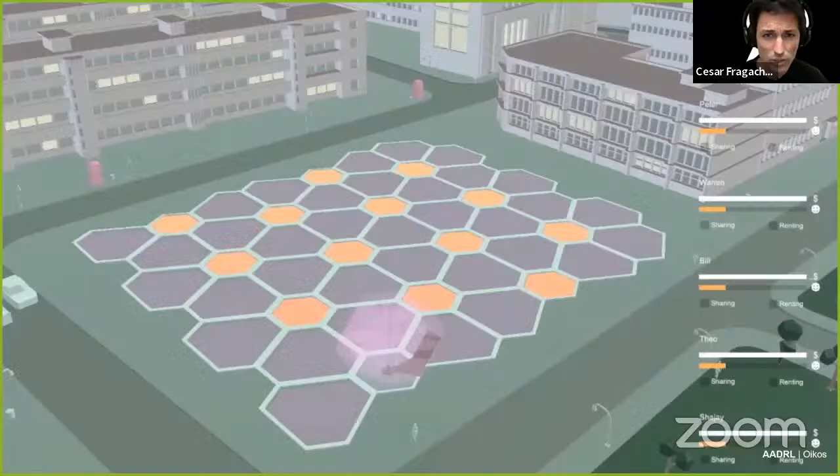I'll take you a little bit through the journey from architect to computational designer, and now as founder of the company, as you mentioned. After leaving Venezuela about 5 years ago, I started at the DRL.

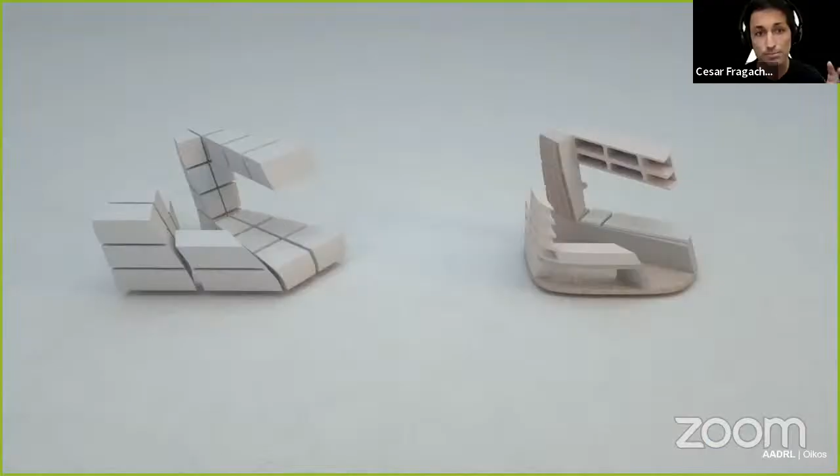I was always quite interested and fascinated by gamification in architecture, and the idea of empowering people to customize their homes. As designers, we want to potentially try to get everyone's intention or everyone's design in, but when working on big projects, it's very hard to satisfy everyone. So nowadays the model is almost about a one-fits-all solution—we've kind of embraced standardization.

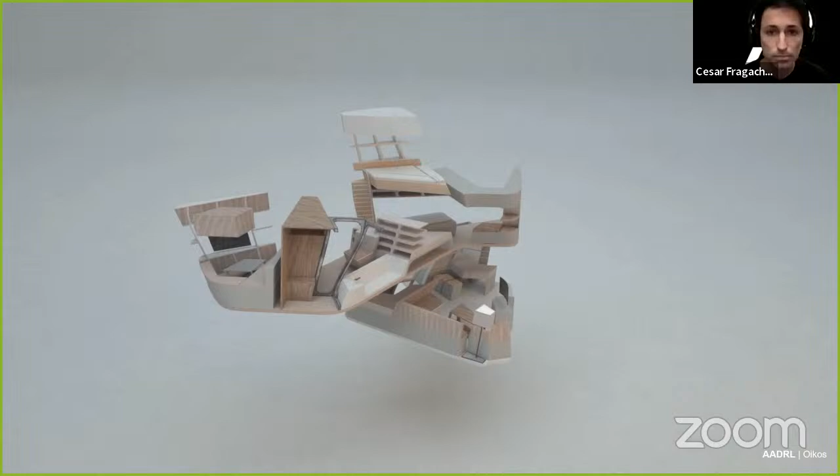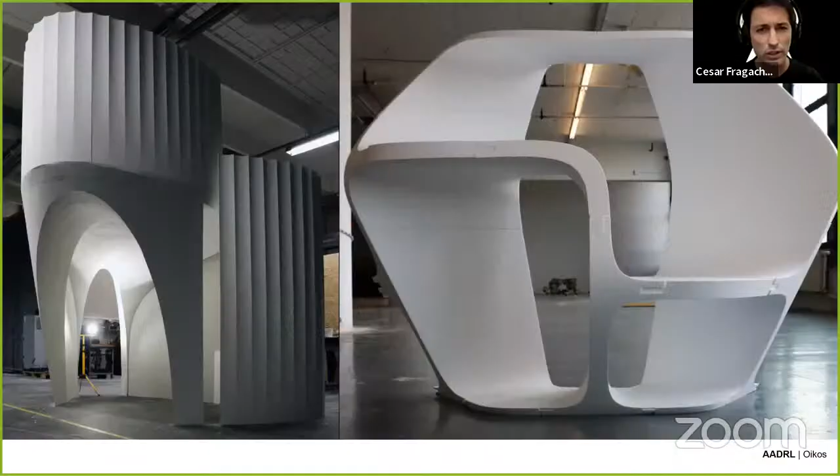The idea of this highly academic project at the time of the master's was to empower people to customize their own homes, their own units, even some of the community spaces. It was a gamified platform where different users jumped in and negotiated a lot of those spaces, collecting data in the process and also leveraging digital fabrication to build some of these spaces. Matching the digital and physical world has been an important part of my career, and something we're also pushing at school.

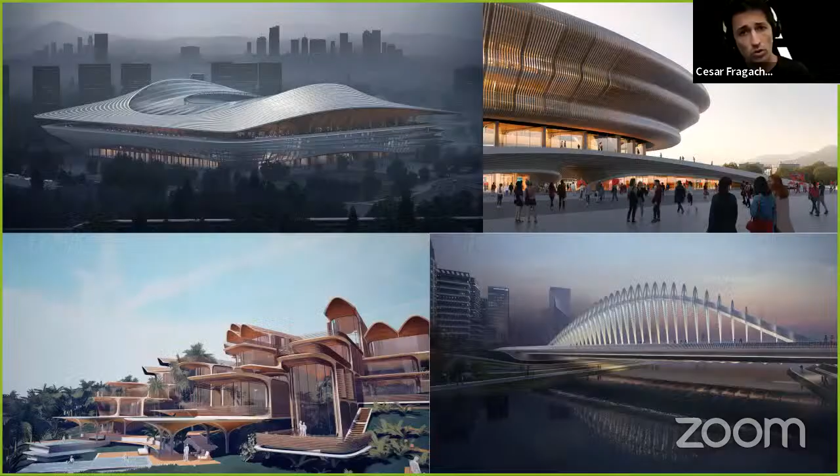These two models you see: one was a one-to-one prototype we did at the DRL with a company called Odico in Denmark. The one on the right was at Autodesk Boston's build space, also leveraging hot wire cutting with robotic fabrication. That led to the journey at the Computational Design Group at Zaha Hadid.

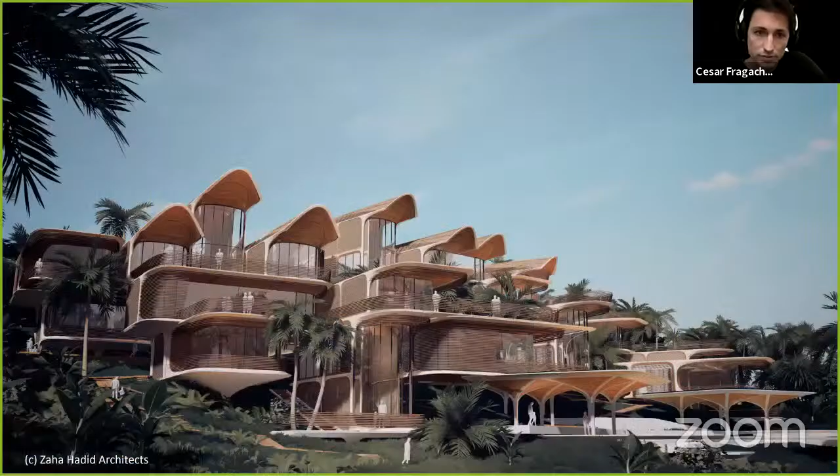We worked on big projects, from competitions to delivery stages, and a lot of these projects involved a lot of computation and rationalization of complex geometry. The one in the bottom left is the Beyabu villas in the Roatan Islands in Honduras.

Everything you see here is modular construction, standardized into a kit of parts, crafted to leverage empowering that kind of design.

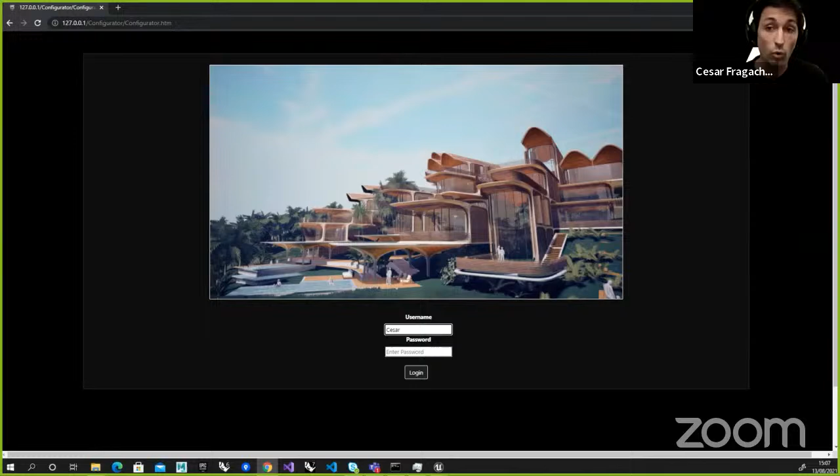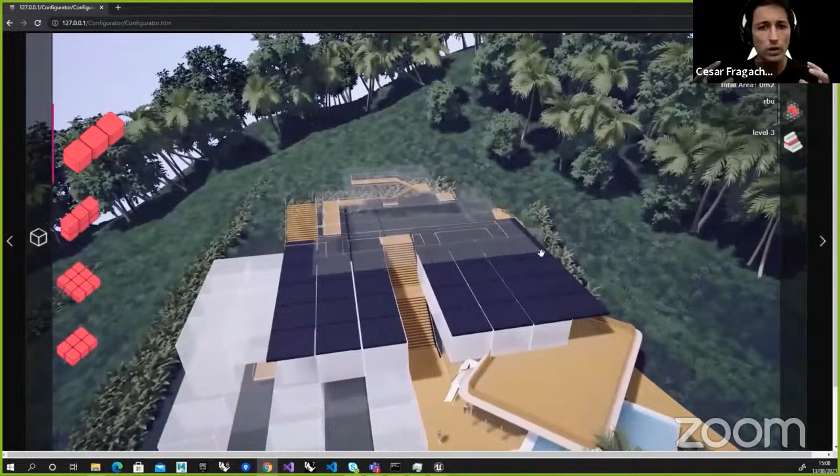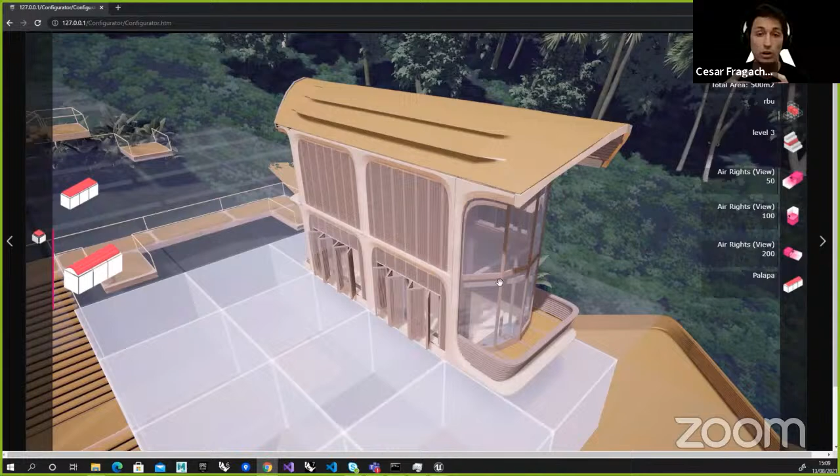For these projects, we built a configurator. Users would come into the platform—we were driving sales of some of these units, gathering data on how people would like to position their spaces, what spatial requirements they'd have, and also adding extra features like buying air rights. So you could say, 'I want to lock the side of my unit because later I want to expand that space,' or 'I don't want anyone on top because I want to add a palapa or a double-height space, so I don't want anyone else above me.' You start buying the air rights as well, not just the unit.

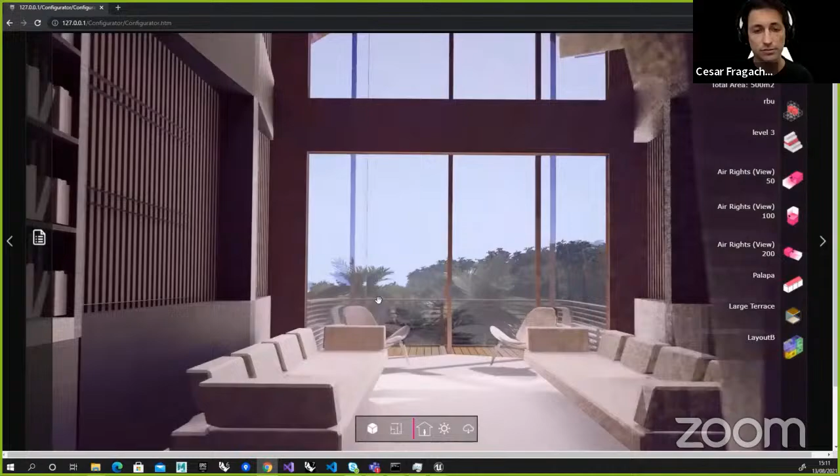You can also start customizing the internal layout for any given modular site. This one is assembled based on three voxels of 5 by 5. Users could get in and look at the view of the property, how neighbors might block the view, and even negotiate some of these spaces.

That turned out to be an interesting exercise, and was actually the pinpoint moment that led me to go out on my own and start Alter. This was the first demo that we built at the company.

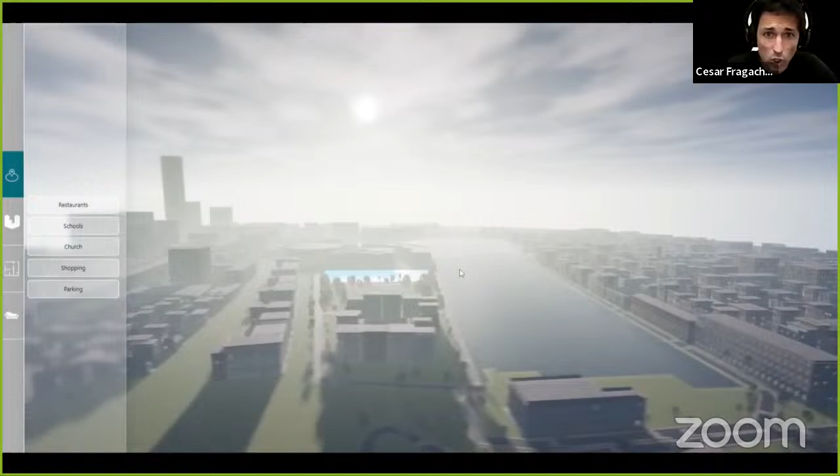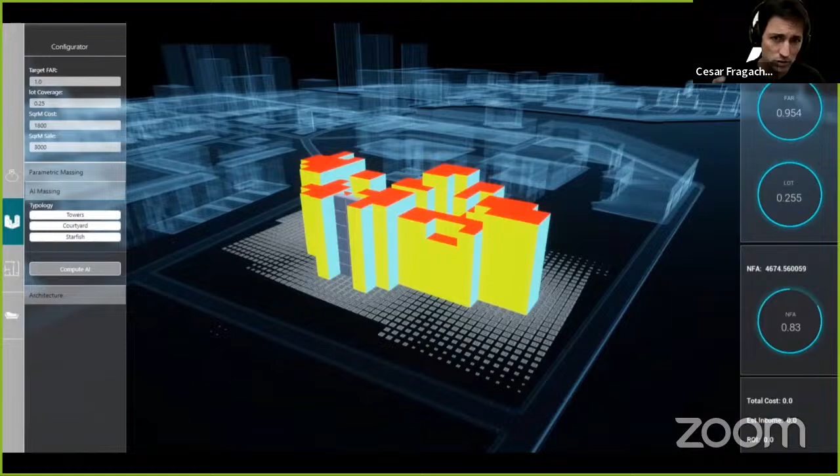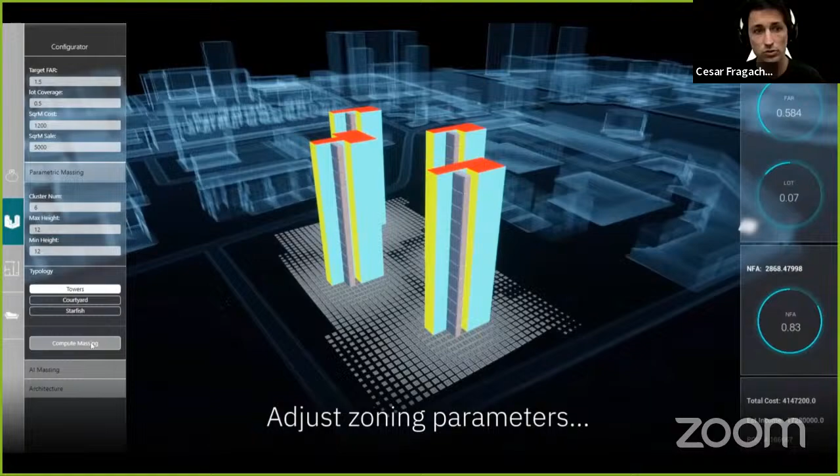So it's connected to OpenStreetMap data, procedurally regenerating a section of the city based on actual information. Then there's an evolutionary algorithm that runs through the site specified by the developer. What you see in colors and optimizing on the right are the financial metrics, and in colors there's the solar radiation. So the algorithm is trying to maximize or minimize some of these quantitative data.

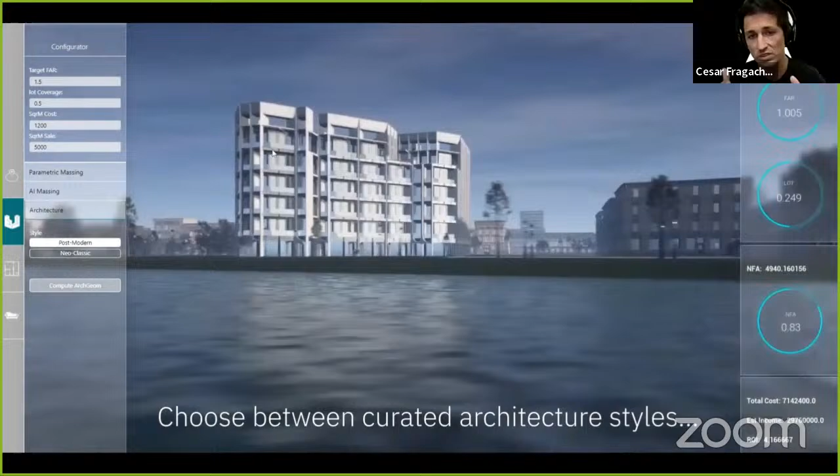Users could also parametrically override some of the findings or outputs from the algorithm, so they could customize how many towers, what's the typology of the building they'd like to see, and they can also style the facade. Everything is deployed within a kit of parts.

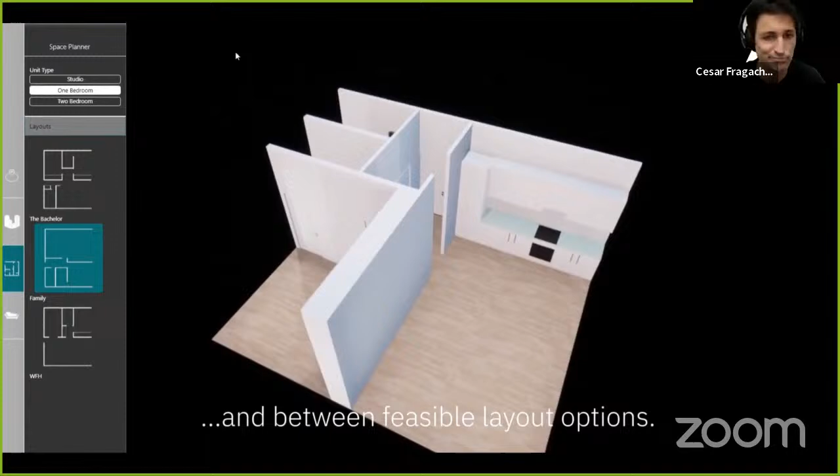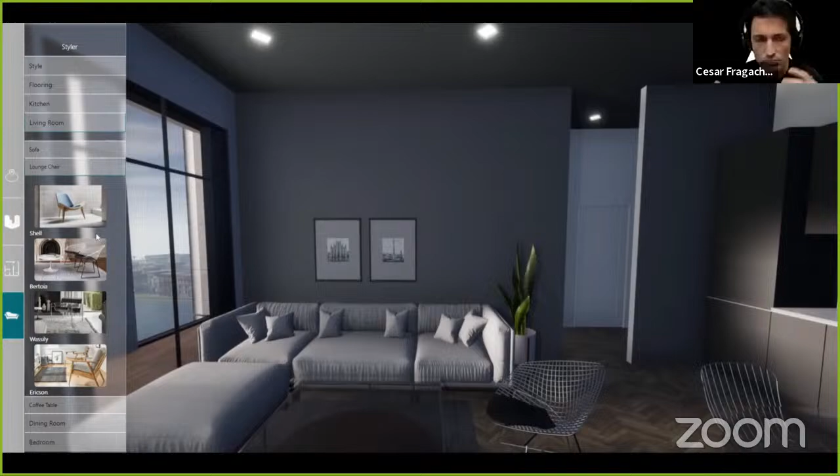And this is not an animation—this is actually how the software is working at the current speed, maybe sped up by half just for the sake of this video, but it's quite fast. Users could actually engage in pre-sales of the construction and start seeing how that unit, which might be generic in structure for all the bottom units, can then be customized in the interiors, giving a bit of gameplay agency to the people buying these houses.

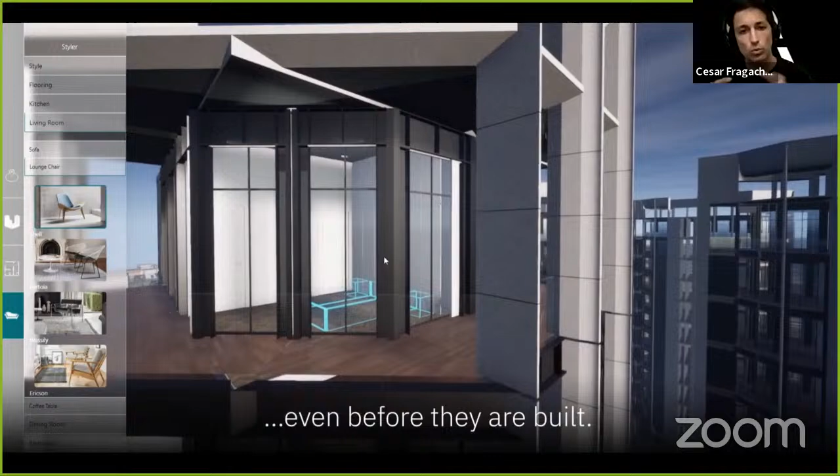They could go through almost like an FPS, a first person shooter game, where they could actually feel the space, the view, the relationship between spaces. Eventually, we're also interested in exploring the virtual community, where you could see what your neighbors are doing on other properties, potentially copy some of them, or even meet them online beforehand.

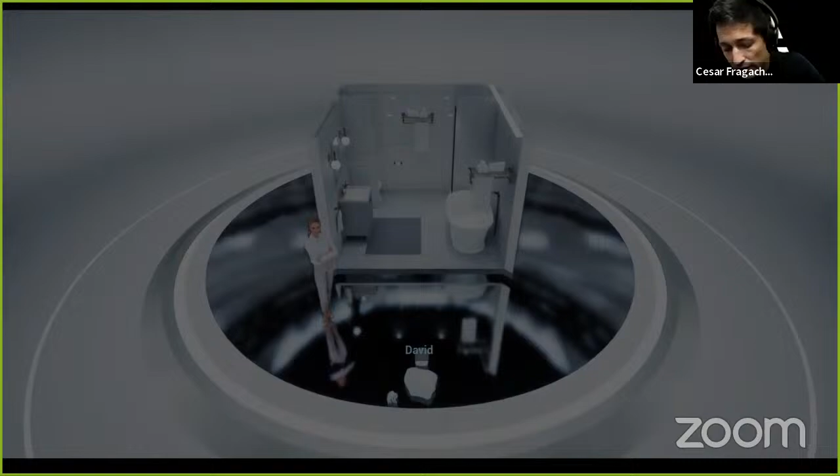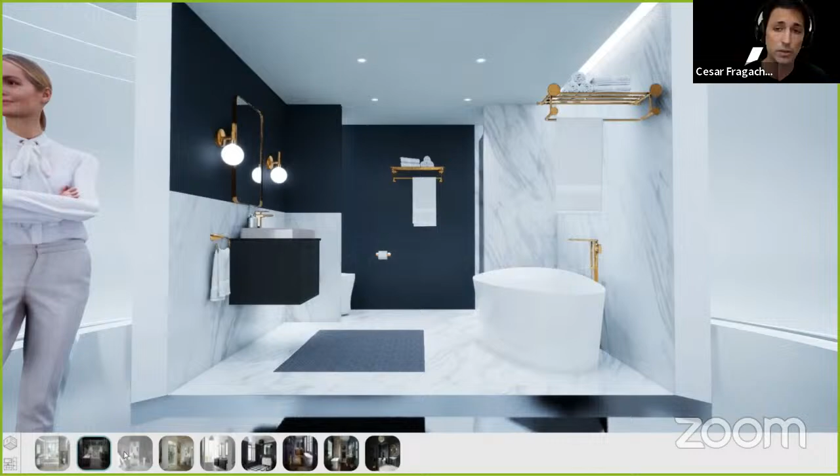So this is another demo, for a home supply store that commercializes high luxury bathroom items. It's building a virtual showroom configurator to start on their stores, then pass to the website. Users could choose the measurement of their bathroom or a specific layout within those measurements, and the system would procedurally generate all the items with embedded styles, letting users choose between styles and go through each item connected to the database of assets to see the price and finishes.

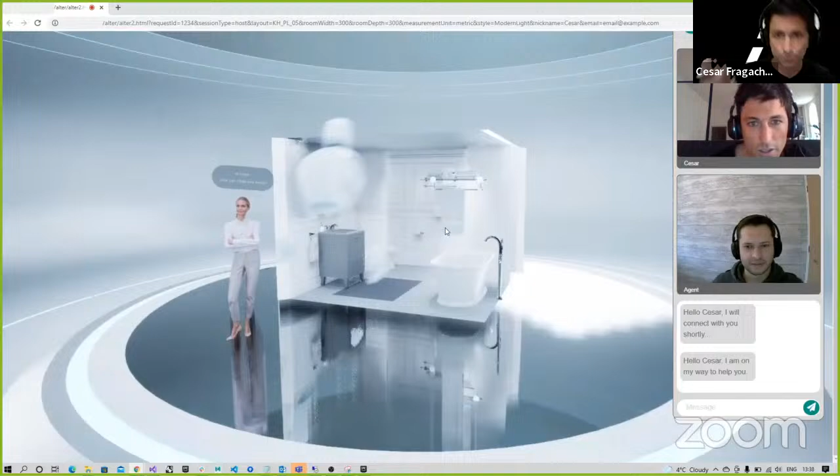So instead of seeing a static view on the website, you would see that specific piece in your bathroom. It's also connected with a multiplayer platform, so you could have a conversation with a virtual agent helping you configure your bathroom, and then produce a full brochure of all the items you're interested in buying.

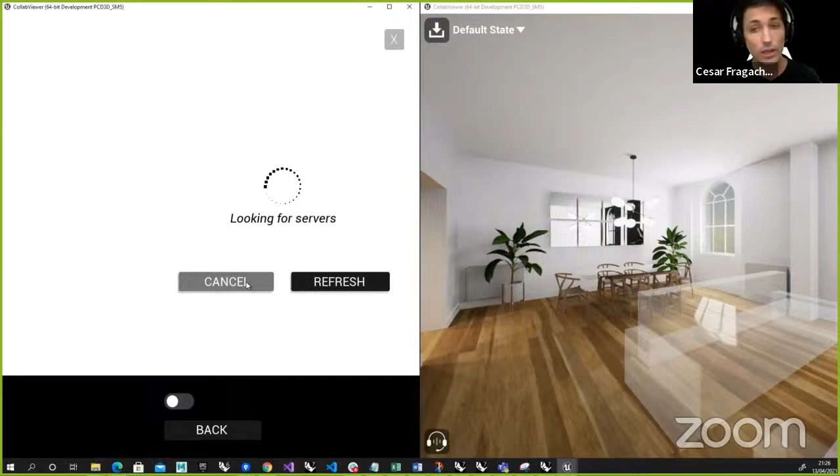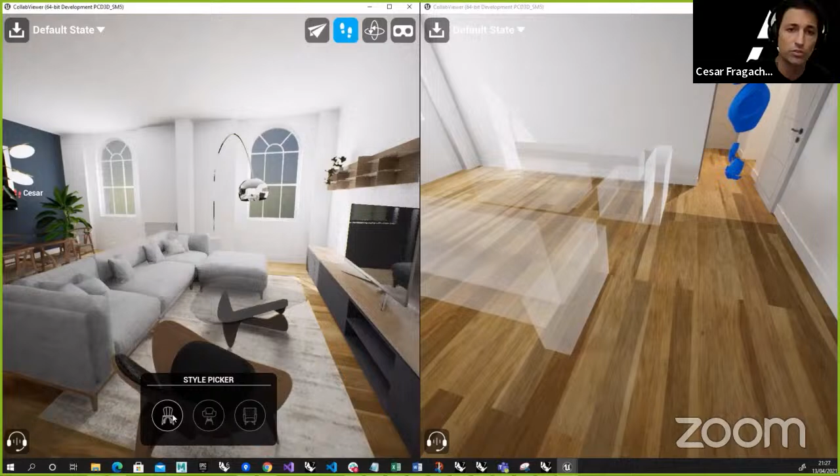So again, a similar experience, more for the real estate world, where two users can be in the same session. This could also be tailored to designers, so they can drive their clients, or agents driving their clients, to show them properties and showcase different potential configurations of that space.

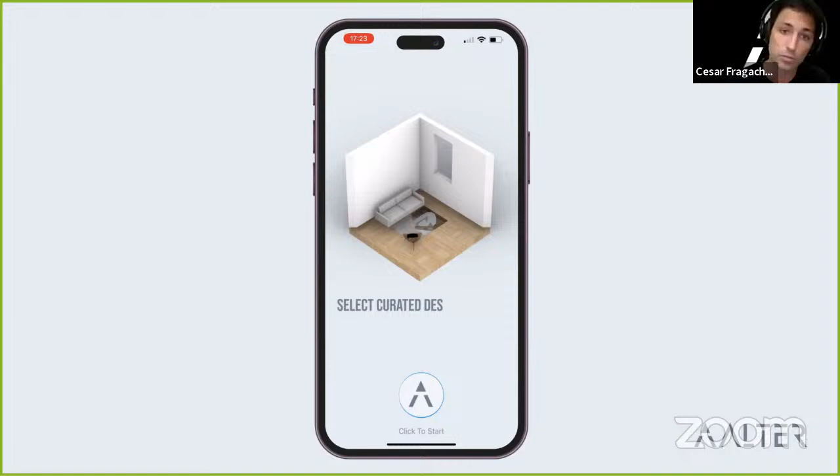One of the things we're currently developing is going to be an app for virtual staging at the beginning, and eventually, if it proves successful, take it to market so people can configure through their phone.

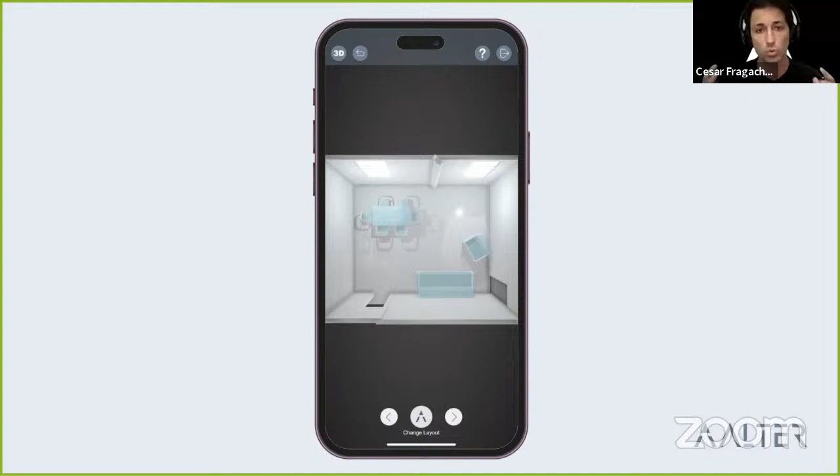It's using RoomPlan technology released by Apple almost a couple of years ago. This technology indexes all the elements within a given space—windows, walls—and then there's an algorithm that starts optimizing based on the space that you want.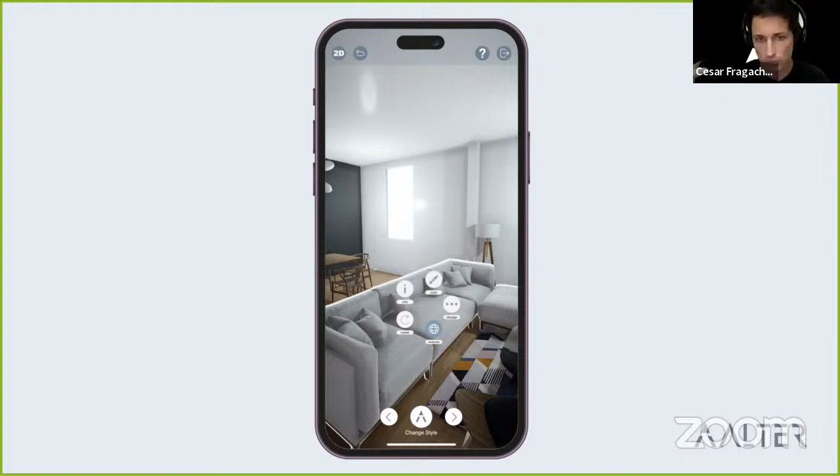Then our technology would procedurally generate all these items, add the given lighting, and it's also connected to the database of the stores. You can then start seeing how all of these furnitures or items look in the space.

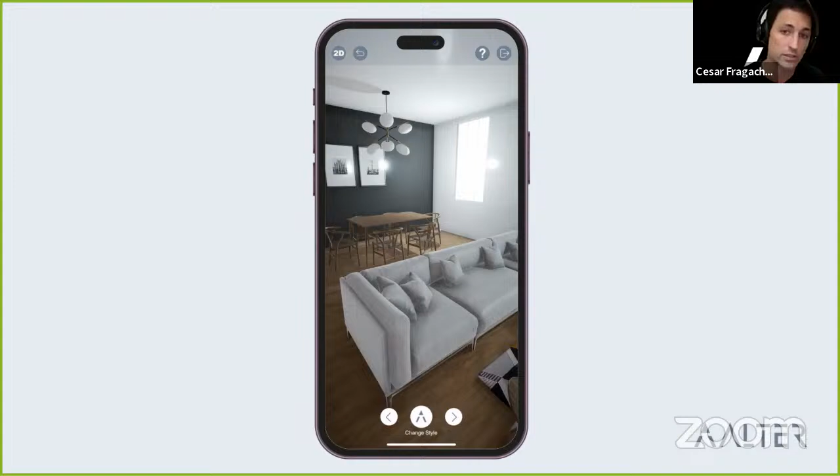You could also have pre-selected styles, and then you can start adjusting them one by one.

This one—so one of our clients is a modular construction company here in the UK.

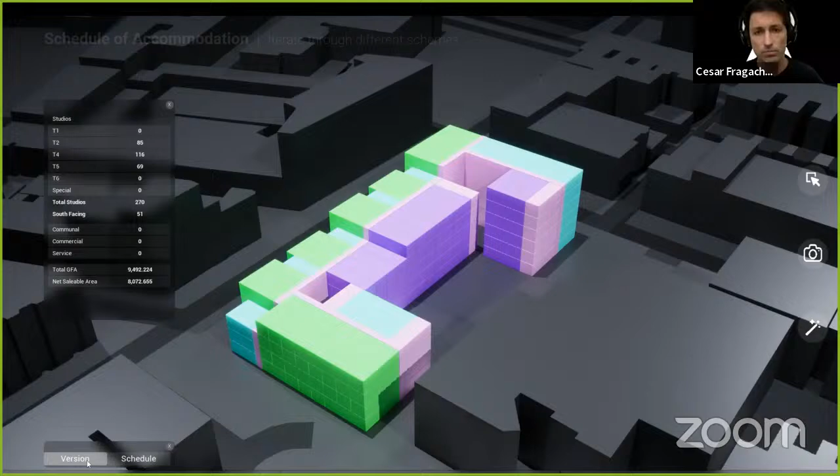They work mainly for student accommodation, and we're developing this tool that they can very quickly iterate through different design concepts, study all the financial metrics, schedules of accommodation, bill of materials.

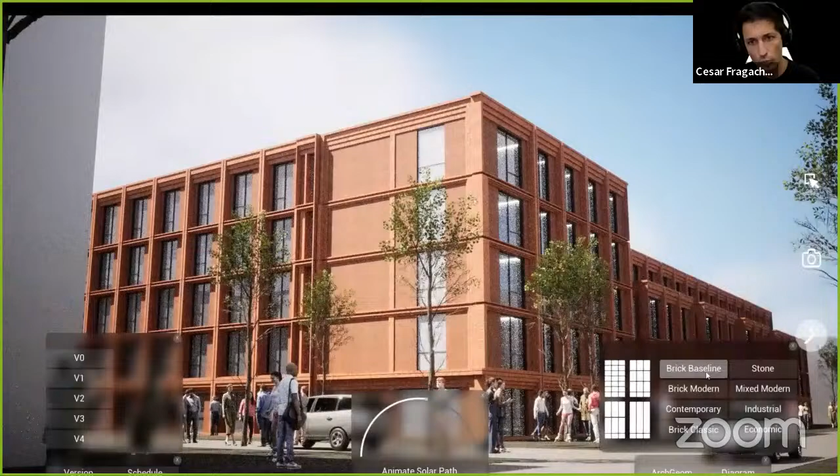So it's a plugin in Rhino and Revit that then communicates with the cloud platform, and then you can start very quickly iterating through different facade styles, of all of the options that are being pushed by the designers.

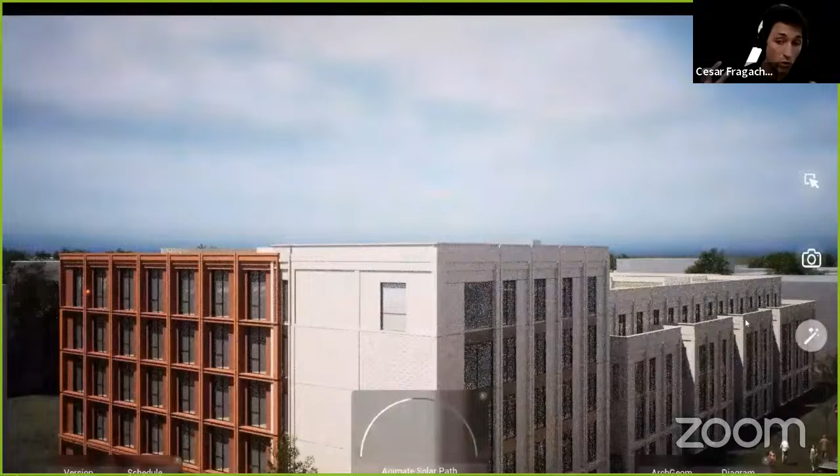So you could not only evaluate a building by financial metrics, or schedules of accommodation, bill of materials, but you can actually qualitatively evaluate a building by its looks, by its facade, and then run solar animations on how the building is exposed to the light throughout the day. It also has a path tracer functionality, since it's built within Unreal Engine, and you can extract all the entourage - people, trees, cars - reconstructed procedurally from OpenStreetMap data.

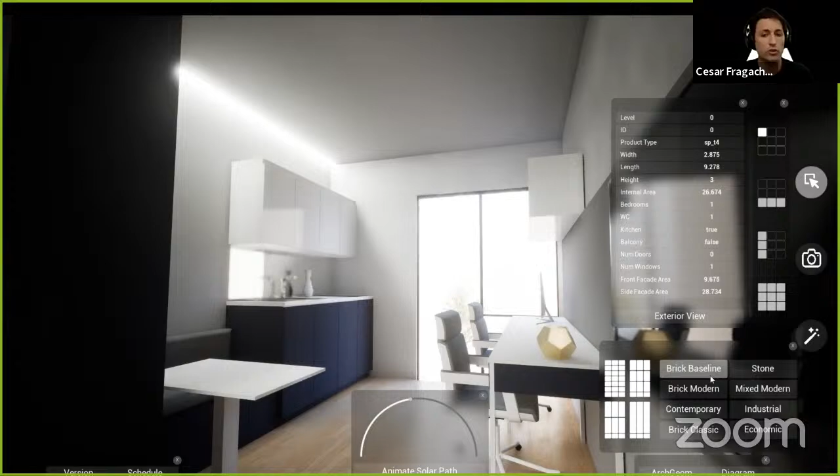So designers don't need to really care that much. There's a lot of time that is spent. This is not to take your high fidelity render that you're going to push, but it's just to take those images that could go through planning applications, or just to take high level decisions in early stages of a project.

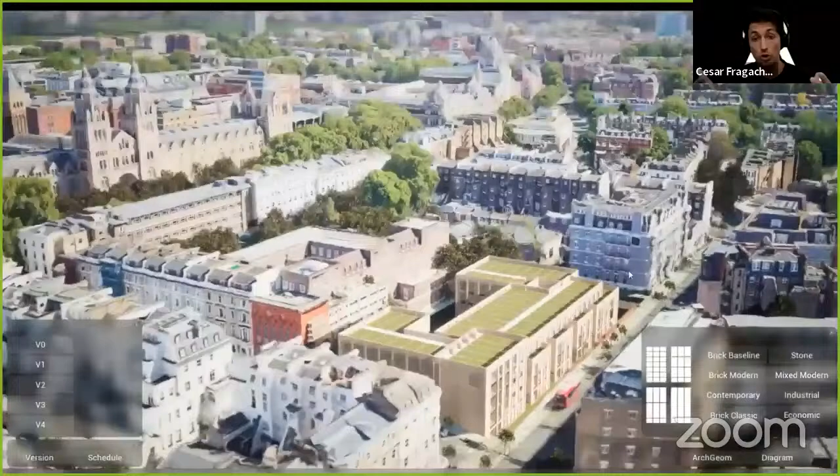Using Cesium, we're also leveraging that technology just to embed Google Tiles and photogrammetry within the building, so you could see how all of your options look within the actual city.

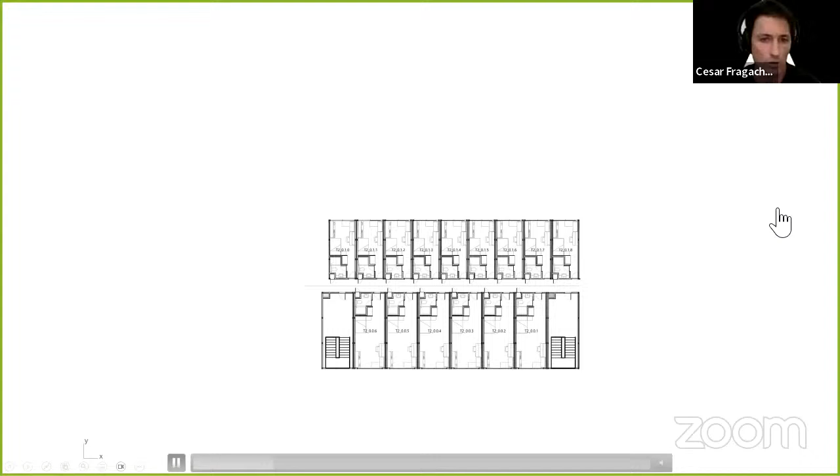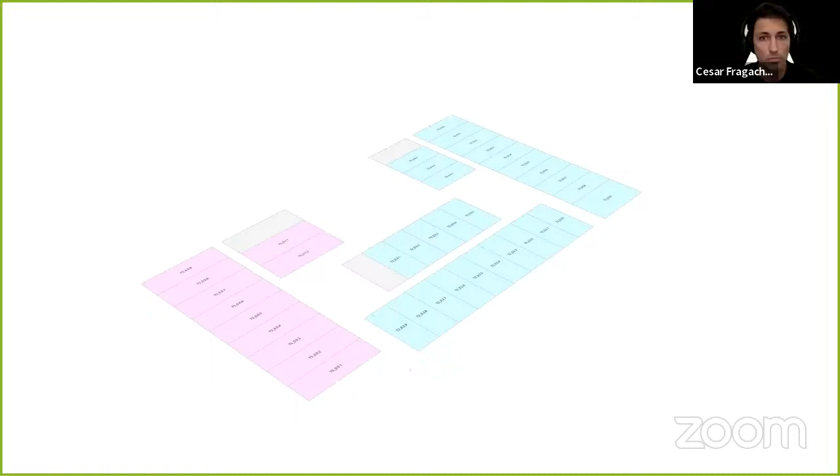And then this is from the plugin side, for Stirling Properties as well. This is the plugin they were currently developing for them, just to have a very quick parametric tool where you could adapt all of their modules based on circulation and fire exit. So it will start computing the optimum dimension of the modules, just to maximize the number of units without sacrificing comfort, and optimizing to have the maximum net sellable area.

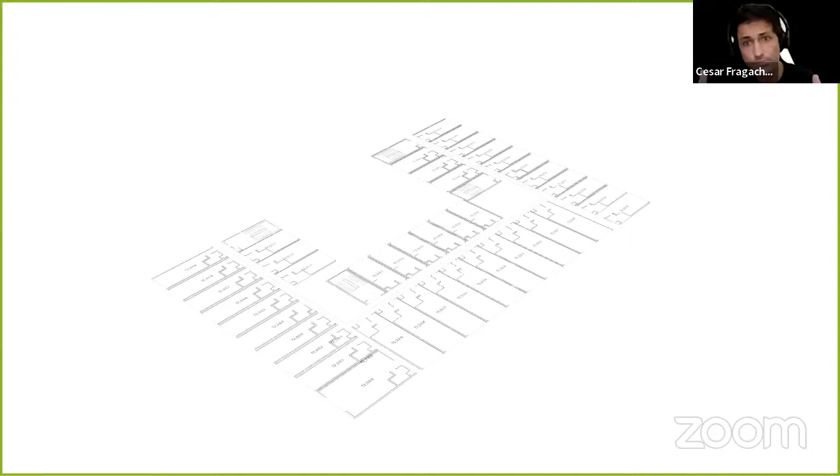And since all the software is intelligent enough that it knows what unit is in a corner, what unit is connected to a circulation, it will deploy all the architectural components, and then all those elements will get exported into a Revit format.

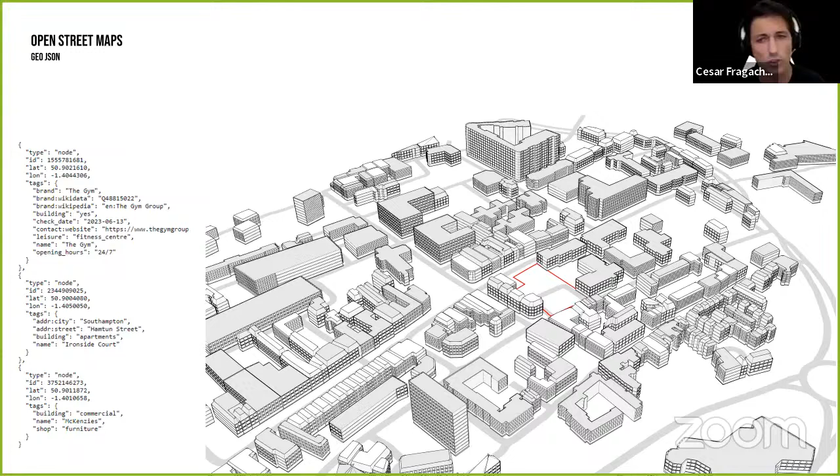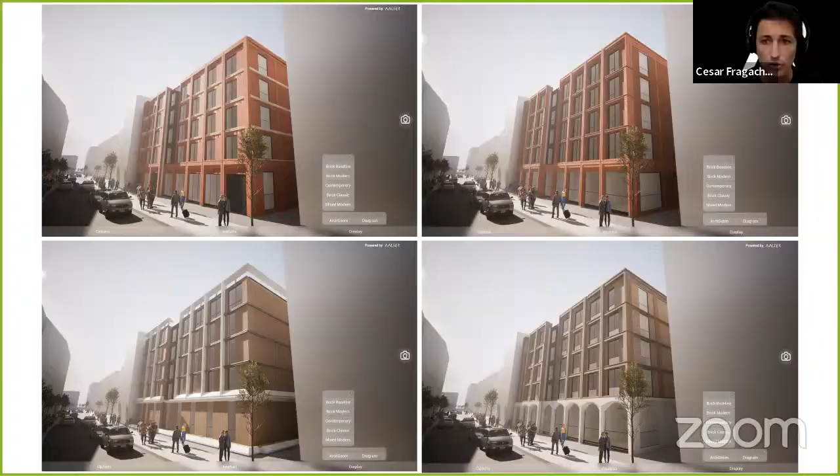So again, this is just a little bit on the technical side, how it connects to OpenStreetMap data. You could run very quickly from the plugin different context analysis straight away. It's all automated. You could see from the app different styles, and different material styles. So you can very quickly evaluate at any point any facade option, or any detail.

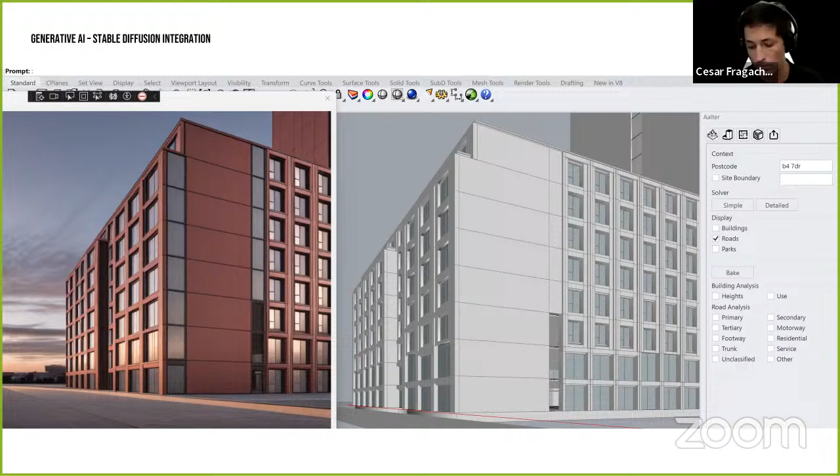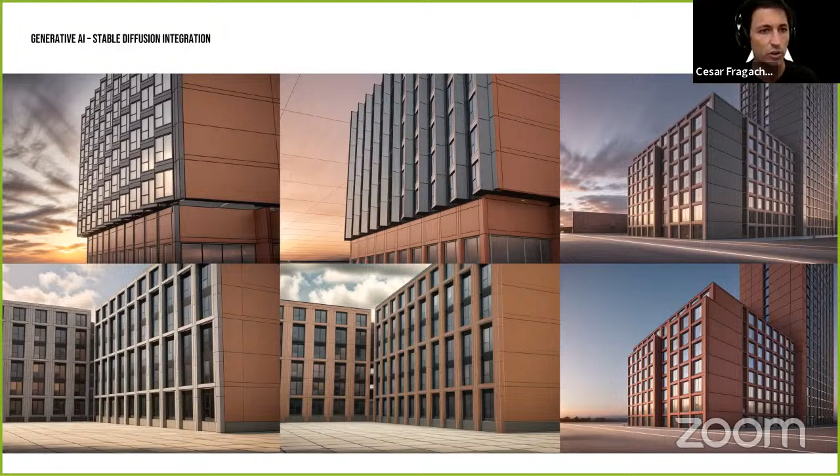So one of the things we just also integrated within the plugin is a Stable Diffusion connector. So you could basically take your screenshot from Rhino, put the prompt, and this one has a LoRA model that is also trained with the client's style. So you could get some high fidelity renders of the actual style too, just to do this very early stage concept exploration of different kits.

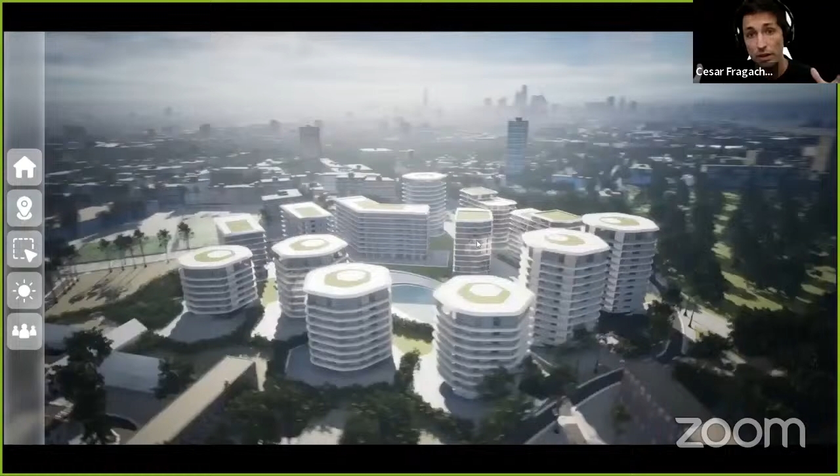And lastly, we work through the different stages. So once there's also a property that can be sold - this is for another client.

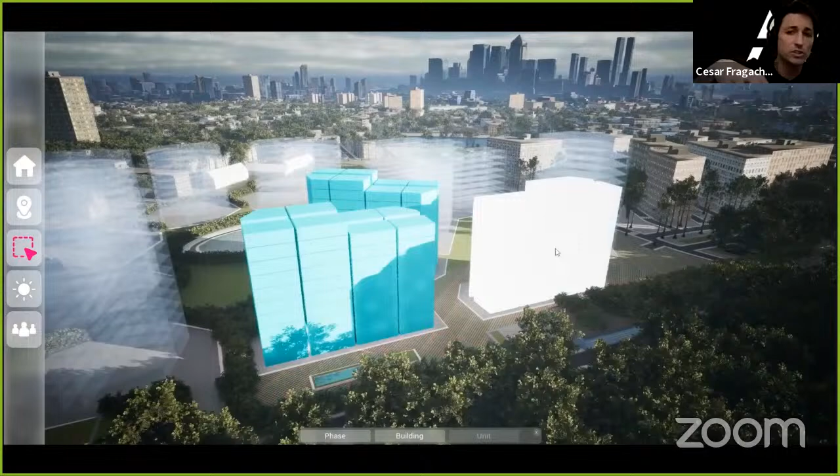So this is a demo also on a complex in London where you can start evaluating, seeing what are the main features on the city, and they have a phase development that is going to come in stages, and they're going to be sold in stages, so they can unlock different sites, and then the users or people interested in buying any of these properties can see the floor plan, get inside, and start choosing between different styles, layouts, and then start configuring each of the furniture.

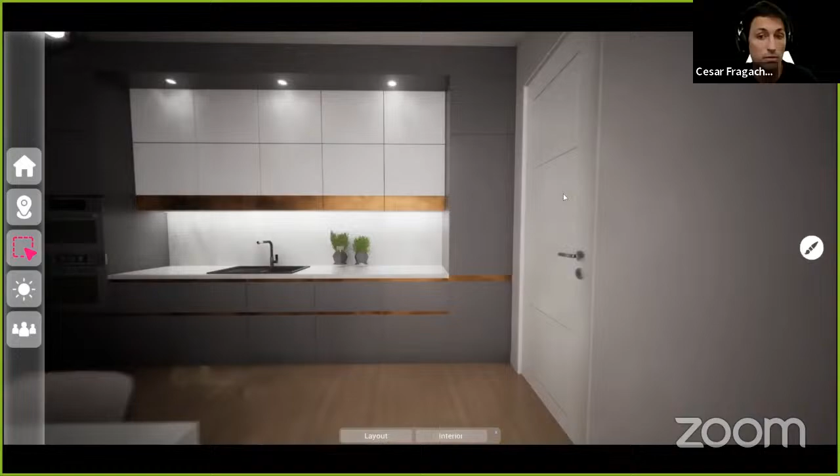So ideally, what we would like to push is potentially you could even completely buy or completely set your interior design. So by the moment you want to move to these properties, you already have all the furniture that you need in the correct location.

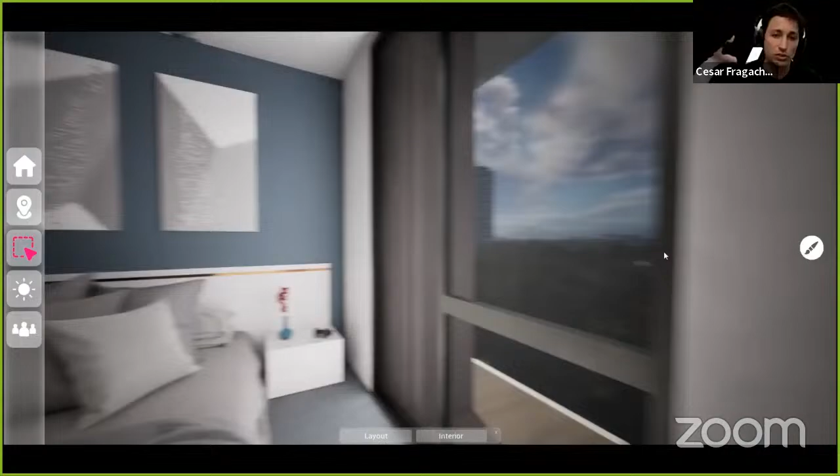So if a digital twin already exists, this digital twin model can live on in the future. So running out different conditions of solar analysis, because people that want to move into some of these properties would like to see what's the view from the property, but also what's the solar influence.

So this is all real time. It's not being animated. This is the kind of quality that you can get from a game engine, specifically on Unreal at the moment.

And then leveraging also the configurator technology that we plug in. So I think that's a little bit on our side. I'll leave it running for a couple more seconds, just to see a couple more shots. But basically, that wraps up the story. We're quite early still at the moment - it's been just a year since we started. So looking forward to what we can push in the future.

Awesome, thank you Cesar, that was very interesting. It's amazing to see your examples, how it is evolving, and the capabilities you're pursuing, and how that will evolve as software, streaming, and technology get better, enabling real-time interactions in design on the web. It seems like an overall industry trend toward collaborative, accessible web apps. Can you talk about your journey and background? Because you do have an interesting background.